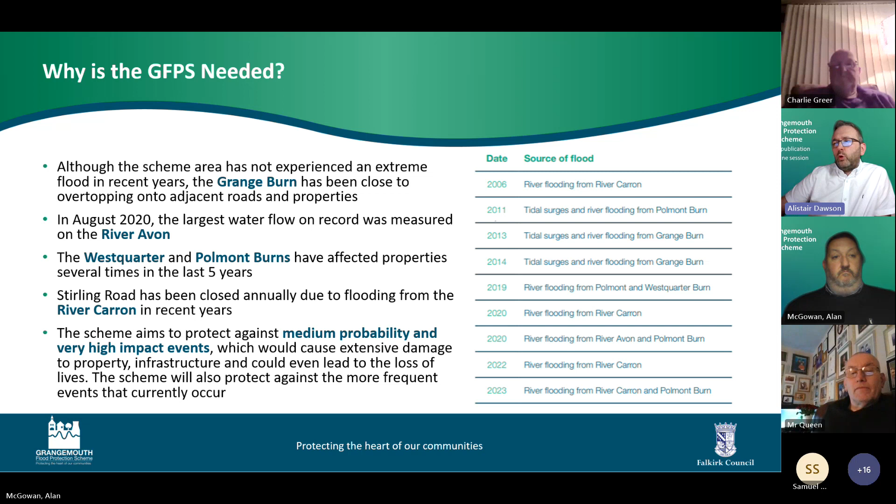So Grangemouth itself and the surrounding communities are actually quite unique in terms of flood risk. The town and surrounding areas are naturally quite flat and low-lying, so they're vulnerable to coastal flooding if there's a particularly high tide. And the peak of high tides can be associated with weather systems and can be influenced by storm surges. Sometimes the extent of coastal flooding isn't just confined to the industry and port along the estuary foreshore, but can actually be experienced quite far upstream.

And I think some of you will recognise that on any given day of the week, you can stand at the Grange Burn or on the Carron as far up as Carronshore, and you can actually see that the tide is in or the tide is out. Some people might not actually be aware how often previous high tides have come close to overtopping the banks of some of these rivers and watercourses.

But the town is also bounded by 3 rivers. We've got the River Carron to the north, the River Avon to the south, and the Grange Burn flowing through the middle of Grangemouth. And that's obviously fed from some smaller tributaries that come down through Polmont, Westquarter, and other parts of the district.

And if you actually think about the catchment area for those 3 watercourses, it's really, really large. It extends all the way from the Campsie Hills in the west and the Carron Valley, all the way around Upper Braes towards Slamannan, Avonbridge, and those other towns and villages to the south of the Falkirk Council district. So there's a vast area that can actually collect that rainfall. And obviously, it all has to flow downstream towards the estuary.

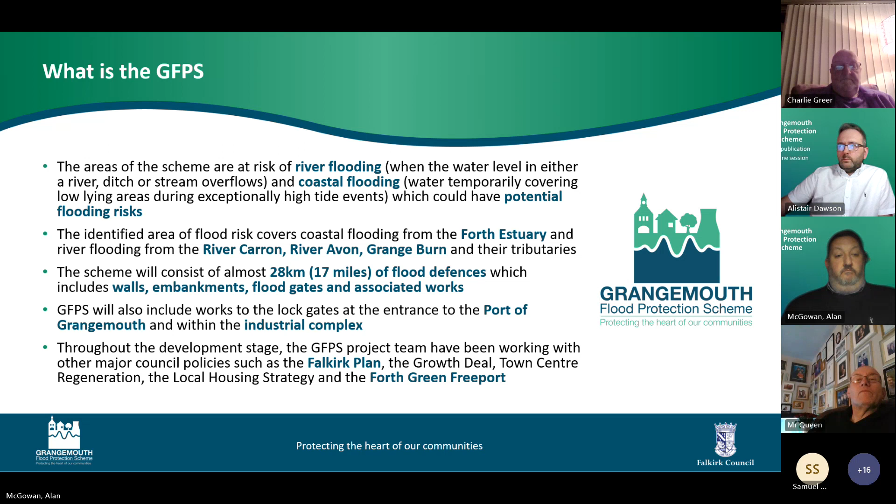As it says in the slide, the need for flood risk management measures in the Falkirk and Grangemouth area, across the whole area, was originally identified through the Forth Estuary Flood Risk Management Strategy way back in 2015. Now in Scotland, flood risk management plans are produced for 14 what are known as local plan districts covering the entire country. And if you want to find out a little bit more about those districts and how the plans are developed, information is available through the SEPA website.

At the time, this strategy for Falkirk for the Forth Estuary was developed, and the strategies were produced for all the other local plan districts. There were a range of mitigation measures proposed for each district. And this can range from flood warning systems, general raising awareness about flood risk, and assisting communities protect themselves, all the way through to the more formal and engineering measures required from flood protection schemes.

And actually, of all the flood schemes from across the whole of Scotland that were put forward to the Scottish Government for prioritisation, the Grangemouth scheme was the one which came out top and is ranked as the number one priority for flood protection scheme in Scotland. Once it's complete, it's anticipated the scheme will offer protection to over 2,500 residential properties and over 1,000 non-residential properties.

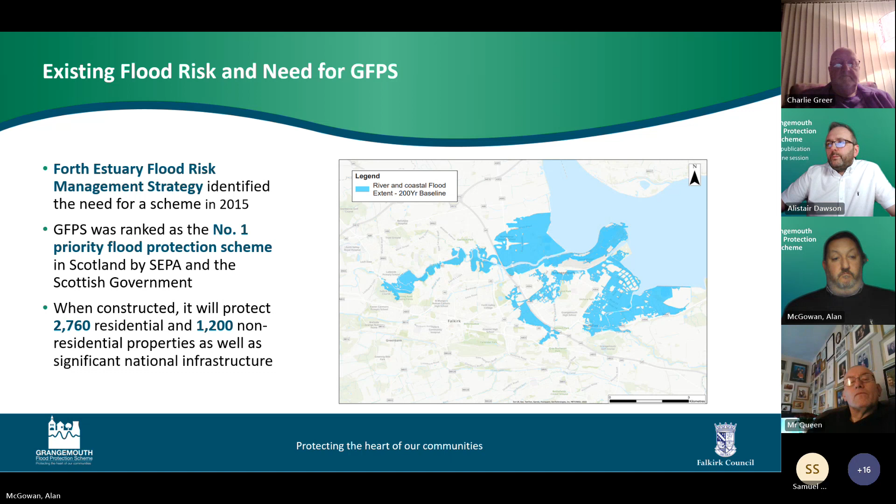I want to just briefly mention a little bit about climate change. So climate change predictions show that the UK is already seeing more frequent and more extreme rainfall events, which lead to more and more flood events. And as a result, it's likely that defences will become even more desirable in the future as the impact of more regular storm or flood events are felt by more and more communities.

As I mentioned earlier, the scheme is being designed to protect against all flood events up to and including the medium probability event. This is sometimes known as a 1 in 200 year event, but I just want to be clear that this doesn't mean that this flood event won't happen for 200 years, and it doesn't mean that it'll only happen once in 200 years. The flood risk is simply a statistical function which expresses the likelihood or the probability that any given location will experience flooding in a year and the impact that the particular size or magnitude of that flood event would cause. So it's the likelihood and the impact.

And if we could just zoom in on, I think Alan, we could probably zoom in on the left-hand side, the first plan, if possible.

I appreciate that flood risk and the terminology that's used in the flood risk community can be quite confusing if you're not familiar with it. But hopefully the maps in this slide and tonight's presentation will begin to help the viewers to understand that a little bit more clearly. So in the flood risk community, we actually use a range of probabilities. 1 in 200 is one that you may have heard, but we actually use a whole range of probabilities from 1 in 2 or 1 in 5, all the way up to 1 in 1,000, which thankfully is pretty rare.

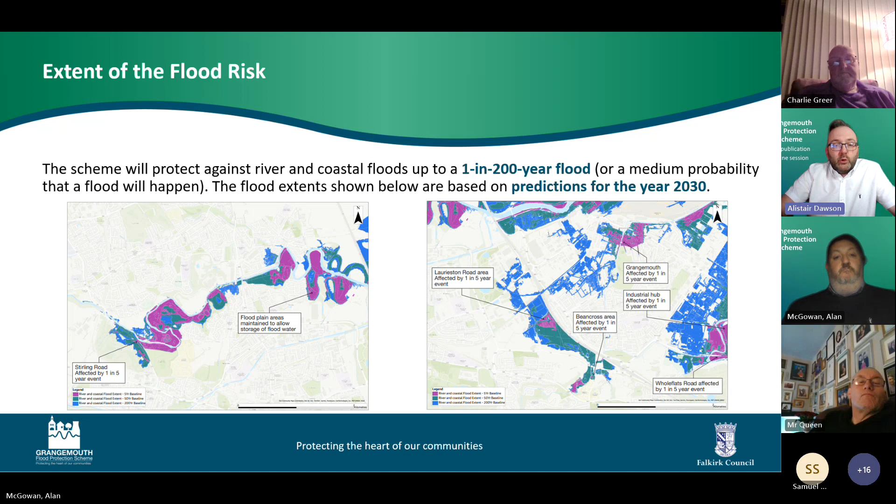And again, just like the previous plan, if you look at the escalation of the flood events, the size and impact of the flood events, the purple, you then add on the blue, and finally the purple, the blue, and the green altogether would be the extent of a flood event for that medium probability event, which is the event we're designing the project to protect communities against. Appreciate it's a little bit difficult, but if anybody's any questions, we'll try and come back to that later on.

Obviously, the Port of Grangemouth and the wider petrochemical industrial complex are key national infrastructure assets, and being in close proximity to the Forth Estuary and sitting at the mouth of the three rivers that we described earlier, these are vulnerable to flood risk, both from tidal or fluvial events. In total, there are around 23 kilometres of the road network which would be affected by the 1 in 200 or medium probability flood event.

And just to take a moment or two to look at the costs and benefits of the scheme. As many of you will be aware from previous communications and press coverage, the estimated cost of this project is considerable. It's currently sitting at between 450 and 672 million. And I would just point out that it is standard practice for projects of this scale and complexity to have a range of costs rather than to home in on a single figure. So that's quite normal at this stage of the project.

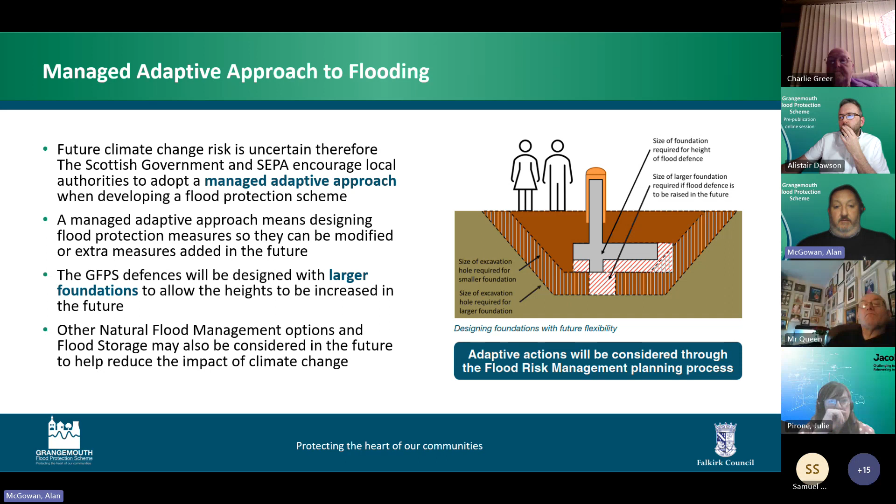So as Alistair mentioned earlier, there's multiple water courses that we're proposing to construct defences on. The main ones being the River Carron, the Grange Burn and the River Avon. But we also have defences on the Westquarter Burn, the Polmont Burn, the flood relief channel itself, which is something I'll look at, the Millhall Burn, and along the estuary. So there is a significant number of water courses that contribute to the flood risk that we experience in the Grangemouth and wider area.

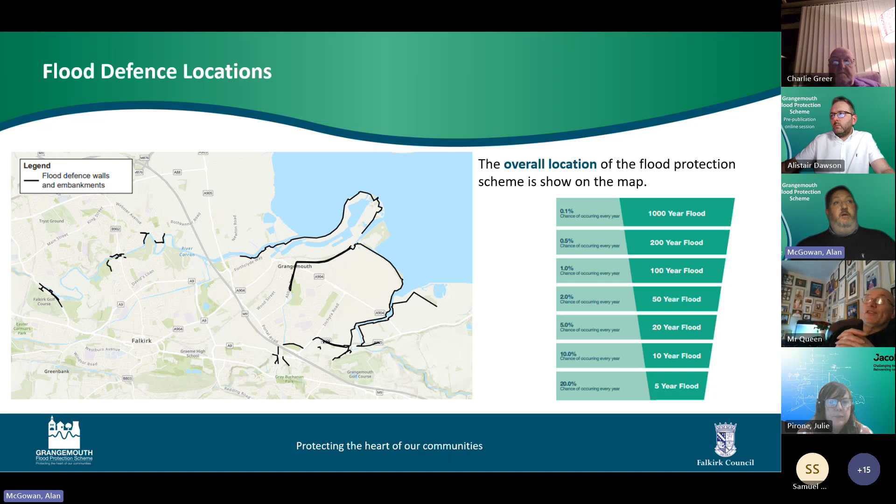But before I move on to start looking at those maps in more detail, I just want to go through some of the types of flood defences that you'll hear me talk about when I'm looking at those maps. The type of flood defence we're proposing for Grangemouth isn't just a single type, whether it's a concrete wall or brick wall. The actual type of defence will vary by location.

The proposed appearance of the wall, whether that's brick or concrete or stone, will be suitable to the area that the wall's located in, with some of the plainer finishes, like just plain concrete, being in the industrial areas where the public don't have any access, and they're much less visible. So just quickly running through these photographs.

The top left-hand image is a photograph of a patterned concrete wall. So this is when the concrete is poured into a liner that has a pattern, and there's hundreds, if not thousands, of different types of pattern. This one here is to mimic a stone wall, but you get all sorts of different patterns, and the specific pattern for Grangemouth hasn't been decided. That would be decided in conjunction with the local planning authority.

The top image in the middle is a brick-clad flood defence. So this uses bricks on the outside. That's what you see. But the core of the wall will either be steel piles or concrete. And the cladding there is purely a decorative feature to make the wall more appealing than just a plain concrete wall.

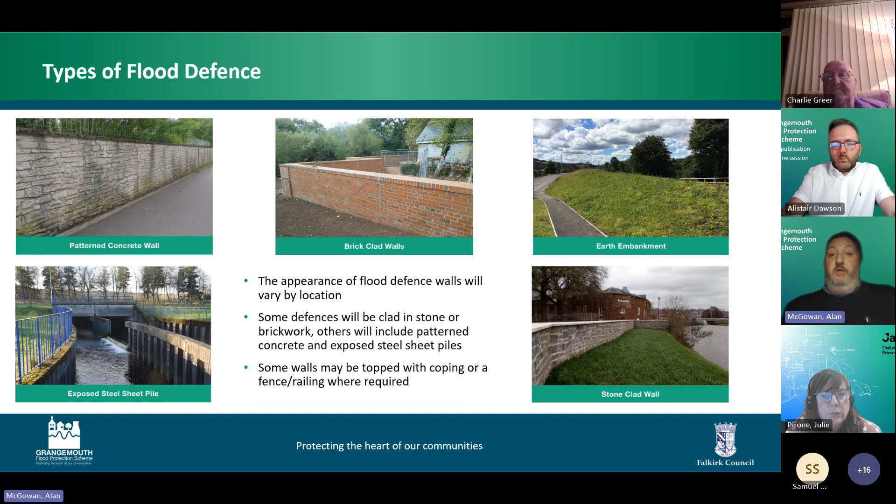And the final image at the bottom right here, and we have quite a lot of this type of wall on the scheme, is a stone-clad flood defence. This is very similar to the brick-clad. The stonework is decorative, and the core of the wall will either be concrete or steel piles, but you won't see any of that once the stonework is complete. So just moving on to a couple of other images of defences I'll talk about.

The top left-hand image shows demountable flood defences. In this particular photograph, the demountable defences are in the process of being erected. Normally, none of that would be visible, so the posts and the panels between the posts would be stored, preferably locally, so that they're close by when they need to be deployed, but they would only be erected when a flood was forecast.

And we have a couple of areas on the scheme where these demountable defences are being proposed, and it's mainly where we need to maintain day-to-day access, so across maybe a wide road where there's not really any other alternative to maintain access and keep the road open most of the time. We have demountables, but when there's a flood event forecast, these would be erected and the road would be closed. They perform a very similar function to the floodgates shown in the top middle here.

Again, these are watertight gates when they're closed. We have quite a number of these on Grangemouth. The majority of them will normally be locked closed, and they're only being provided to allow for future maintenance, whether that's grass cutting or some other type of access. So those gates would be opened when the maintenance is required and then closed again. But we do have other gates that will be open normally to provide access, and then again, when a flood event is forecast, they would be closed.

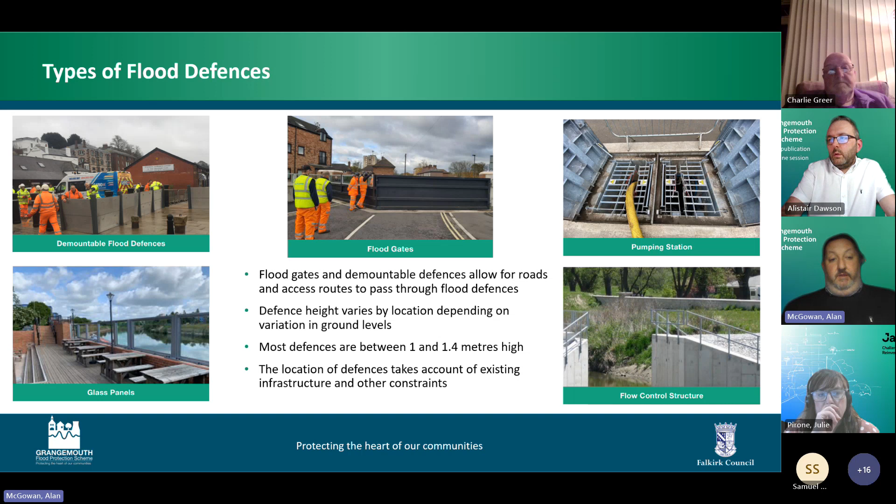But before looking at the maps, as Alistair and Julie mentioned earlier, we have had a number of engagement events before. We have had feedback from the public, and I just wanted to go over a few things that have changed since the last engagement sessions that we had. And previously, not just at the previous engagement sessions, but during the whole process of developing this scheme over the last number of years, a major concern, rightly so, has been the removal of trees. And it's not something that we want to do if we can avoid it.

But unfortunately, in some areas, because of the constraints that we have, trees might be one constraint, the position of a building, a structure, underground pipes and utilities. These are all constraints that we have to consider when positioning flood defence walls and other structures. And in some locations, there just isn't space between the source of the risk, so the watercourse, and the properties that we're trying to protect. The only piece of land that we can possibly construct a flood defence on is possibly where there's trees. And in that circumstance, it's unavoidable that the trees are going to be affected.

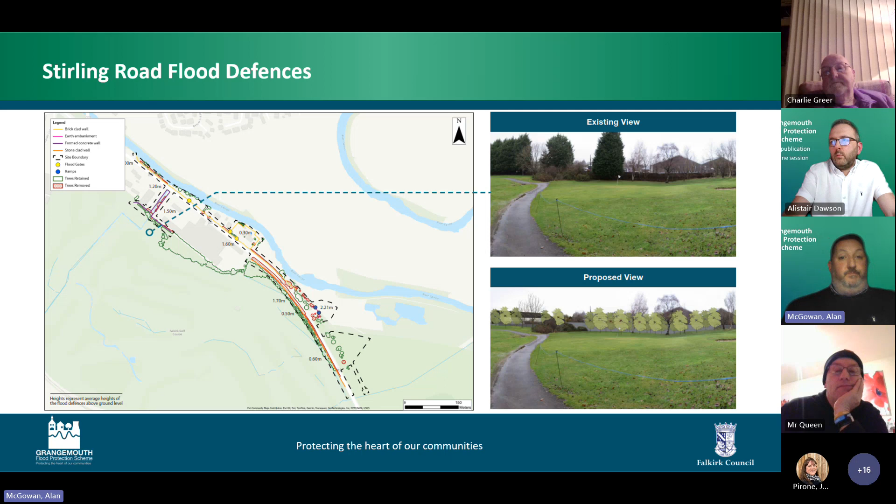Moving further downstream to the Carron Shore area, we've got the Stenhouse Road here and the New Carron Road there, and the old Carron Works is sitting in here. So we have an earth embankment proposed along the west side of Park Road and Sainford Crescent, with the bulk of the other walls being either brick clad or stone clad. I think on the south of the new Carron Works it's stone clad, but it does change to a brick clad wall between the two bridges, and extends slightly downstream of New Carron Bridge behind Beaumont Drive. I think the wall extends as far as the fourth house downstream from the bridge.

In addition, we are proposing to replace the New Carron Road Bridge. The Stenhouse Road Bridge will have the demountable barriers that I mentioned earlier constructed at either end. So during a flood event or an extreme flood event, those barriers would be erected and Stenhouse Road will be closed. We did consider something similar for the New Carron Bridge, but if we were to close that bridge during a flood event, the only route that we could be certain would be open during a flood event that goes north-south or south-north would be the M9. There would be no other road crossing, with the exception of Stirling Road, which hopefully would be open as well. The bridge just to the west of Stirling Road.

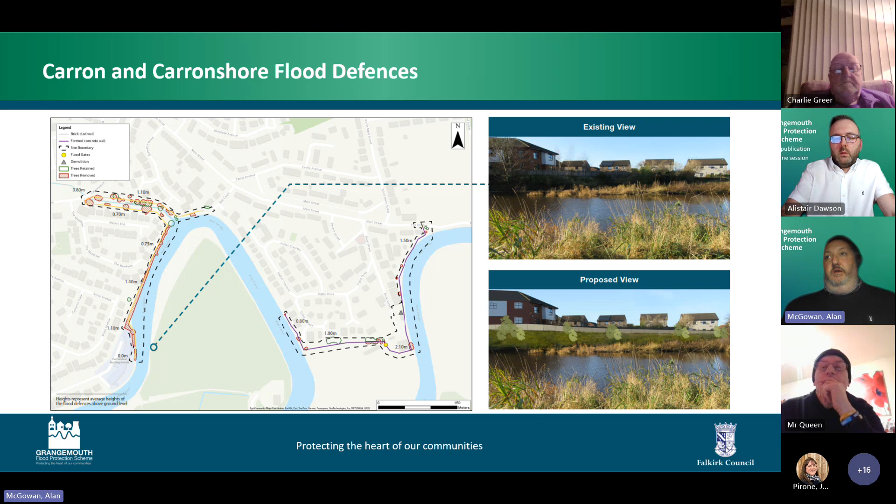Moving across to the Bean Cross area. So we have the West Quarter burn on this part of the image, the Polmont burn to the east. Both of those, whilst this map indicates that they come together just at the M9, the actual crossing under the M9 is basically two pipes, with the West Quarter burn in the pipe to the left as you look at this image, and the Polmont burn in the pipe to the east.

And when they cross under the M9, the Polmont burn, essentially in normal circumstances, is what flows into the flood relief channel, which you have here, and the West Quarter burn becomes the Grange burn, which heads in a northerly direction towards Zetland Park.

So the flood defence walls in this location are all predominantly a patterned concrete finish, with the exception of the flood defence walls around Grandsable Cottage, which is just at the entrance to the cemetery, where the walls will be stone clad to match the existing building.

Another key feature of the defences in this area is there's an existing underpass under the M9. Now, if you're familiar with this area, you will have seen that this underpass regularly floods. And in the event that Alistair mentioned earlier in August 2020, what we actually saw happening there was that water spilled out of the West Quarter burn, flowed through the underpass under the M9, affected the properties on the north, but then headed in a northwesterly direction and started to affect the properties around Lauriston Road.

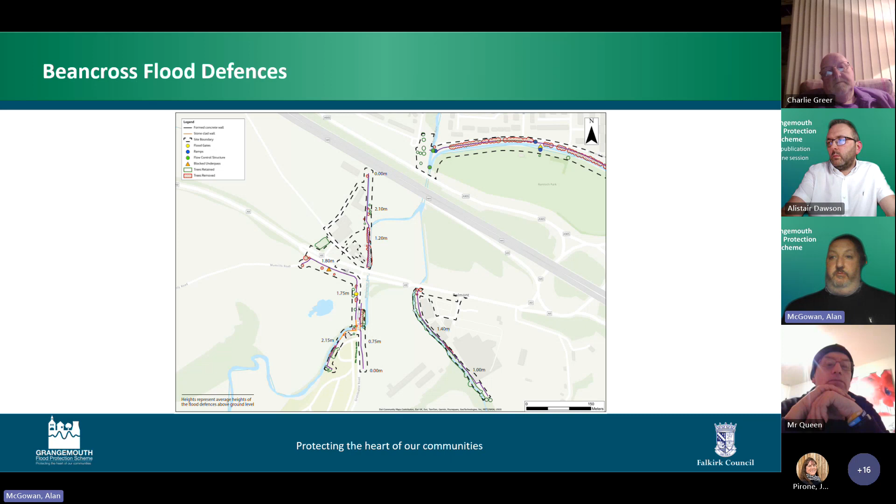So looking at Rannoch Park, this is just the other side of the M9 from where we were looking. So we have the Grange burn running south to north, and then we have the flood relief channel that runs along Rannoch Road, crosses under Inchyra Road, and then runs in a northeasterly direction.

The proposal here is to construct a new flow control structure that I mentioned earlier when we were looking at photographs. And the purpose of this is to limit how much water is then passed forward down into Grangemouth town centre along the Grange burn. I mentioned earlier that because we are blocking the underpass, actually more water is going to pass through the M9. So if we didn't put that control structure in place, we would need flood defences between Rannoch Park and Zetland Park, which we were keen to avoid.

So we're diverting more water along the flood relief channel, and in order to accommodate that increase in flow, we're having to build some defences along the flood relief channel. So we're building a formed concrete wall along the north side of the channel.

And we are also proposing to refurbish the entire channel. It was constructed in the late 50s, early 60s, and it is in poor condition in places. So we will be refurbishing the entire channel as part of the scheme.

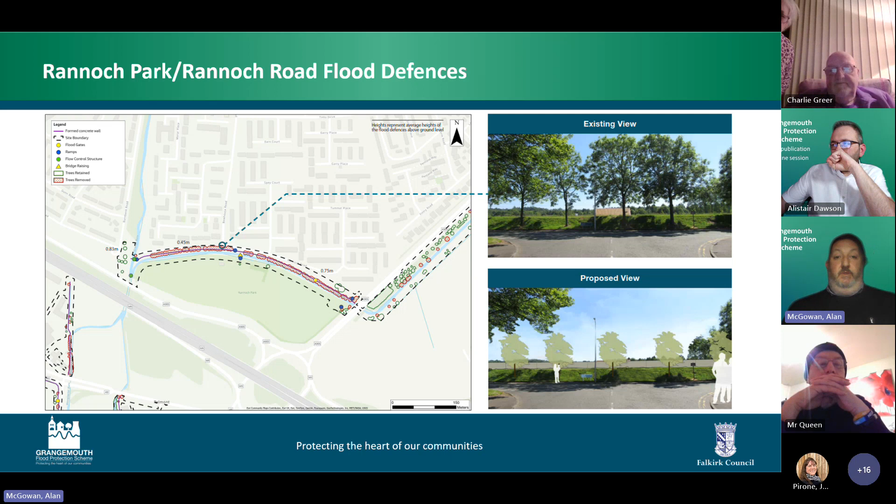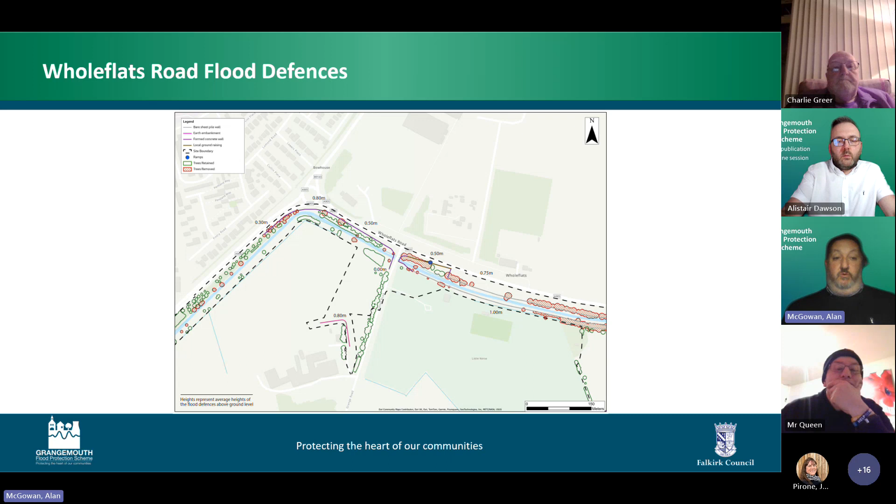And this is just a continuation of the flood relief channel further downstream along Wholeflats Road, where we have formed flood defences, patterned concrete around the junction of Inchyra Road and Wholeflats Road, and then further east, which is hard to see on this map, but if you access it online, there is a light grey line along here, which is a bare sheet pile wall, and that's just because we're starting to enter into the kind of industrial areas, and that's been deemed suitable for those areas. And as I mentioned, the flood relief channel on this slide as well will also be refurbished.

Moving along, the flood relief channel is just to the north of this image, where it joins the River Avon. This is a very complex area in the scheme. You have the Mill Hall burn that is running from the bottom left image up towards the River Avon. We have the River Avon. We just see the corner of it here where it passes underneath Wholeflats Road, and we have the flood relief channel. So we have 3 water courses all coming together at one location, and the water level in any one of those water courses has the potential to impact on the other.

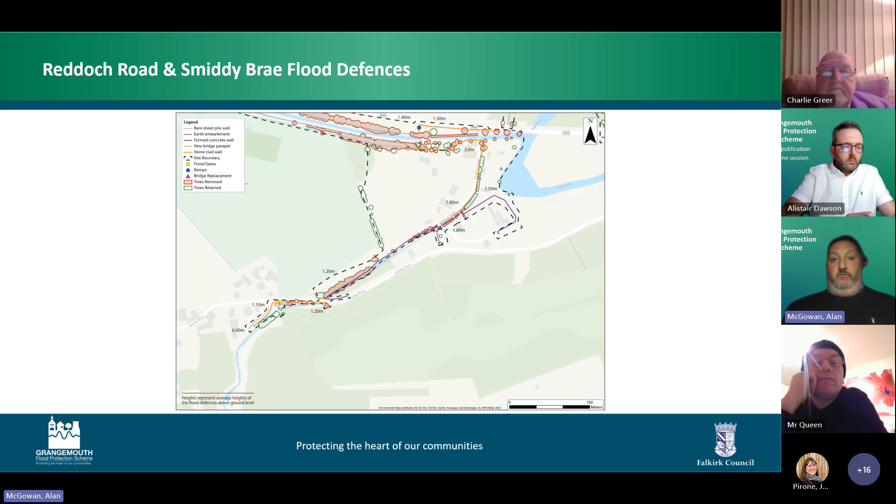So we have flood defences basically starting in the Mill Hall burn from Mill Hall Gardens, which will be a stone-clad wall around those residential properties. Where it then passes under Smiddy Brae, it changes to a formed concrete wall along the north side of the Mill Hall burn, and then it changes back to a stone-clad wall just around the residential properties around Reddoch Road, and around the stables here we have a formed concrete wall.

Moving into Grangemouth town centre itself, this is Zetland Park, the green area, and basically our flood defences start at the children's play park. So along the west side of the Grange burn, we have a stone-clad wall, pretty much continuous from here, and you'll see on the next slide, all the way down to South Shore Road. The flood defences on the east side are predominantly, again, a stone-clad wall, but the section of defence between the children's play park, which is about here, and the existing kiosk in Zetland Park is going to be an earth embankment that's going to be sown with wildflowers to replace the existing wildflower meadow.

We will be replacing the 2 footbridges within Zetland Park, and also replacing Dalratho Road Bridge with a new structure that has solid parapets to retain the flood water.

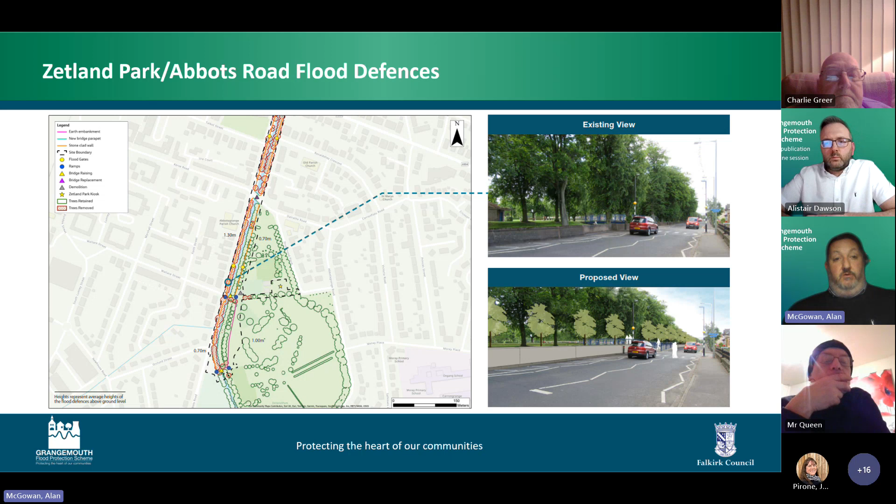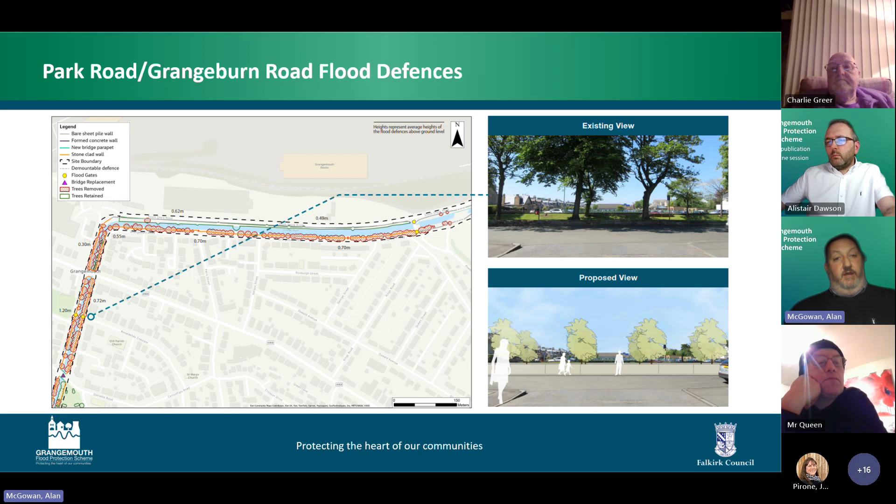And as we move further north, still on the Grange burn, again, those stone-clad walls continue. When we get to this 90-degree bend in the water course, the flood defence on the north side, which is South Shore Road, is going to be an exposed steel pile wall as you're in that industrial area. On the south side of the Grange burn, the stone-clad wall will continue all the way along to Powdrake Road. And Bo'ness Road, it's just worth mentioning that the existing bridge is going to be retained there, but the parapets are going to be replaced and strengthened to actually contain the flood water, because the predicted depth of flood water is actually higher than the road level at that location.

These are the final 2 maps that we're going to look at, and we're not going to spend much time on these, just to give some context, as we've predominantly talked about the residential areas. This is the industrial areas and the port and petrochemical plant. So this is the River Avon, and we have basically exposed steel piles along both sides of the River Avon. We do have some lengths of a concrete wall where we're going to be using a bored pile technique to construct the wall, and we also have a section of a hybrid, which is part embankment, part steel sheet pile wall just behind the wastewater treatment works.

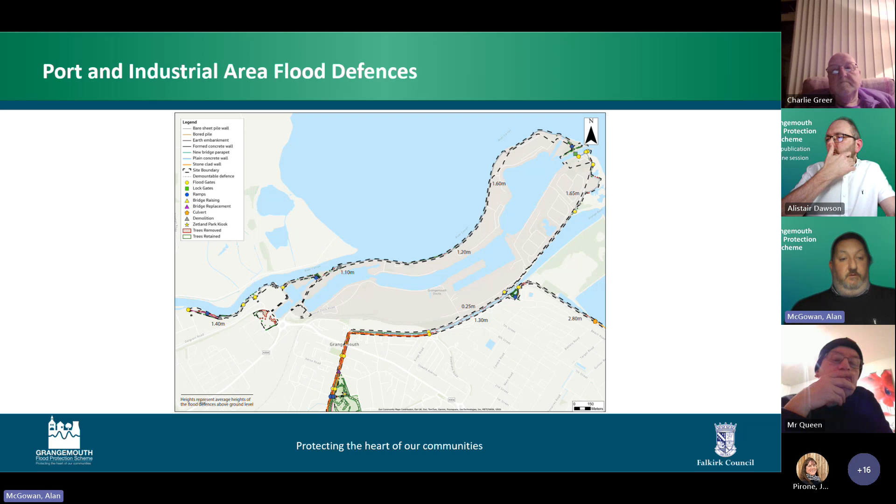And the final image is of the port area. It also does cover the lower Grange burn, but we've discussed that in previous slides. But around the port, it's primarily an exposed steel pile wall that we'll be constructing, and replacing the middle set of gates on the entrance channel into the port.

I mentioned that these plans will be available online. In addition to these, we will have some 3D visualizations available both at the in-person events next week and also on the virtual exhibition, and they will also be uploaded to the YouTube channel covering the areas that I've identified there. And I just wanted to give you a quick snapshot of what they will be like.

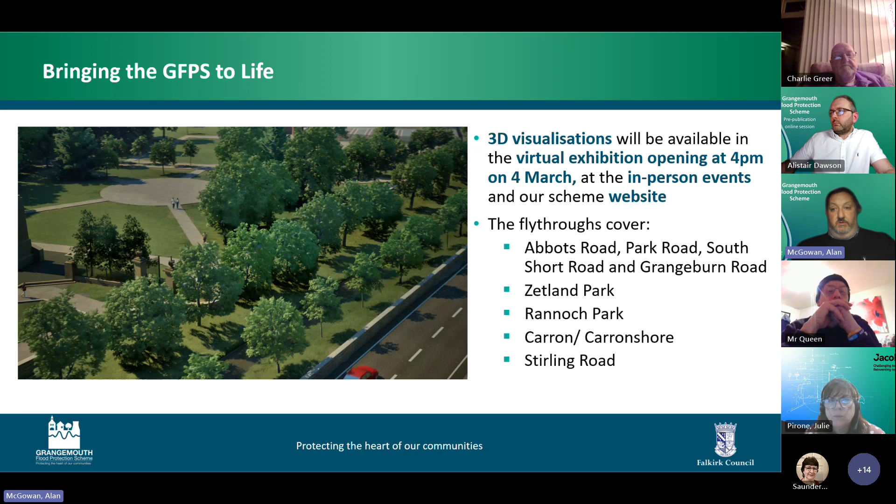So this is just the entrance into Zetland Park, and this is showing after the works have been complete and the trees that I talked about being felled on Abbots Road have been replaced. But it's just to give you a quick snippet of what will be available from next week. And at that point, I'm just going to stop for any questions that anyone may have.

Thanks very much, Alan. We've got a few questions in the chat already, and the first question I'm going to come to is Carole Christie's, who's asking about funding, Alistair, and I'm probably going to ask you to answer that. So Carole has asked, what have the Scottish Government committed to in monetary terms at present? Appropriate funding model maybe needs a bit of clarification for lay people like me.

Thanks for that. So when the flood schemes were all prioritised, there was an annual budget set aside to go towards the delivery and implementation of these prioritised national flood schemes. Over the course of time, some of those schemes have cost significantly more than was originally anticipated, and the government is basically looking at their funding that's available and working out how they're going to fund those other projects

across the country. But Grangemouth actually is a slightly different case, and we've had a commitment from the Scottish Government that they're going to work specifically with ourselves at Falkirk Council to come up with funding for this scheme, which will presumably sit slightly different to the funding for those other national schemes that are being taken forward.

So the funding model that we're looking at might involve things like investment through the Scottish National Investment Bank. There's various public-private finance initiatives that may be appropriate, but at this point in time, it's not clear just exactly what the funding model itself will look like.

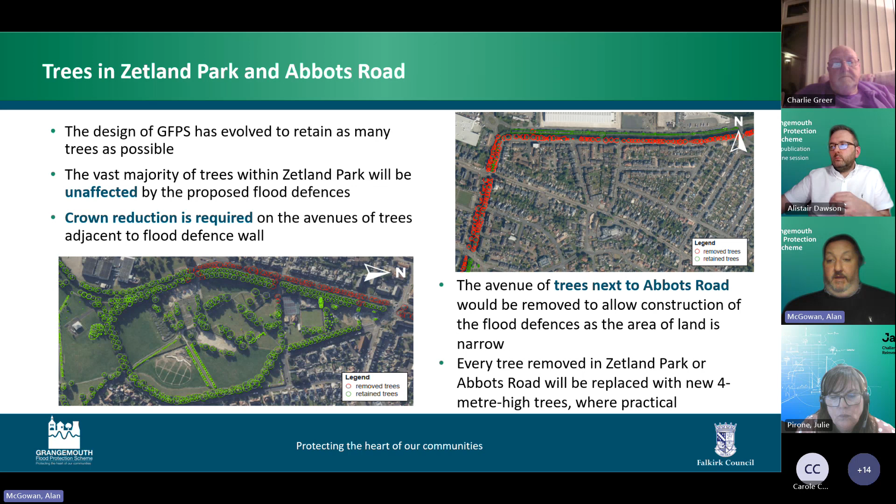But that's, I think, everything that I was going to say, and I'll just pass over to Alistair to cover the last couple of slides. Thanks, Alan, and thanks everybody for sticking with us this far. I promise there's only a couple more slides to go, but they are quite important aspects, and I wanted to spend a few moments just to make sure that everybody's clear and aware of the next steps and where we go next.

The project will be promoted by Falkirk Council under, as Alan mentioned earlier, the Flood Risk Management (Scotland) Act 2009. That's the specific legislation that covers works of this nature. And within that legislation, there are very, very specific requirements and processes and procedures which have to be followed.

But essentially, at the end of it, the legislation allows Falkirk Council to seek the necessary legal powers that would be required to move forward and ultimately to undertake any part of the construction works. So none of the construction, none of the defences can happen without going through this statutory process.